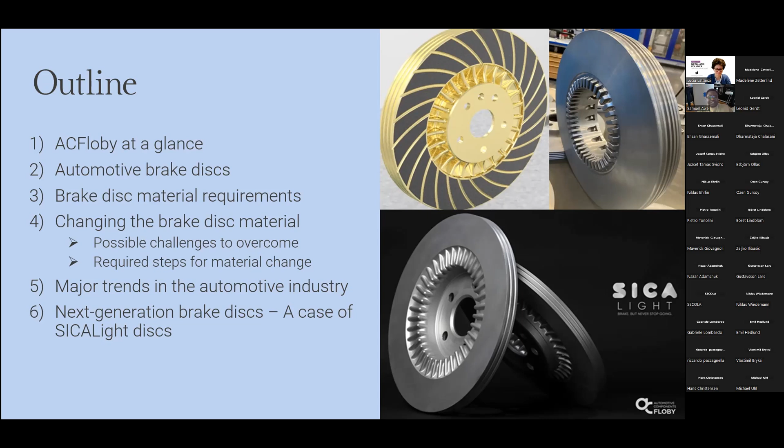Automotive Component Floby is a company that was founded in 1965, and the company since then has been producing different automotive parts for auto manufacturers. You could see from the picture some of the products we produce. Here is a brake disc from gray cast iron material. Also, we have brake discs from aluminum composite material, trade name SICALight brake disc. Then we produce connecting rods for different vehicle models. We produce wheel hubs for trucks, and different processing methods and surface treatments we perform at the company.

Yes, before we go into the full discussion, we want you to answer this question in the chat. How many of you want to be confident in driving your car? So this is a good question that will give us an introduction to what we are going to discuss.

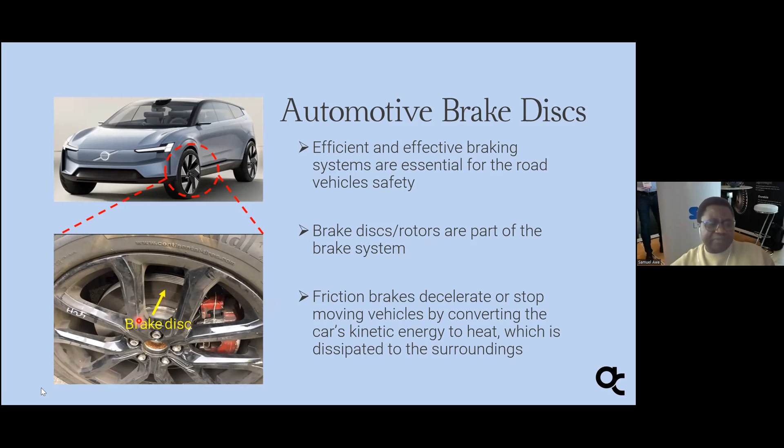During the braking regime, heat is generated, and this heat is majorly concentrated on the surface of the disc. If this heat continues accumulating during the braking regime, it could lead to overheating of the brake component, and this overheating could cause brake fading.

Brake fading simply means loss of friction, and increase in the temperature of the disc leads to increased wear, and that will also lead to thermal cracking as a result of a thermal gradient happening on the surface of the disc. An example of thermal cracking is what you see on the disc here, which eventually leads to failure of the disc.

As a result of this, it is very important that material for brake disc should meet certain material properties to prevent loss of function.

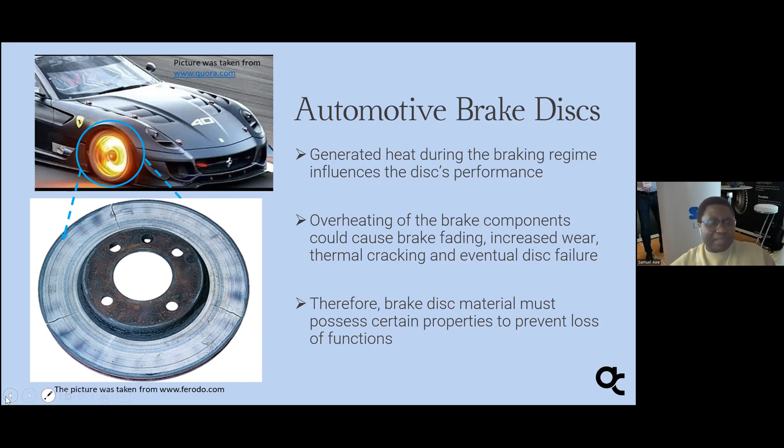Here are some brake disc material requirements. As I've explained in the introduction, the brake disc material must maintain high temperature properties, because the disc is usually subjected to high temperature during the braking system and regime. So this material must meet this high temperature property.

It should have a good wear resistance, because we don't want to generate more fine particles. Then it should be corrosion resistant. Now that we have electric vehicles, corrosion becomes so important, so the material should have high corrosion resistance.

At the same time, the material should be lighter in weight, especially for electric vehicles. The weight of electric vehicles is higher, and this is important too. The OEMs are looking at different ways to reduce weight, because increase in weight has an effect on car performance as well as drive range, especially for electric vehicles.

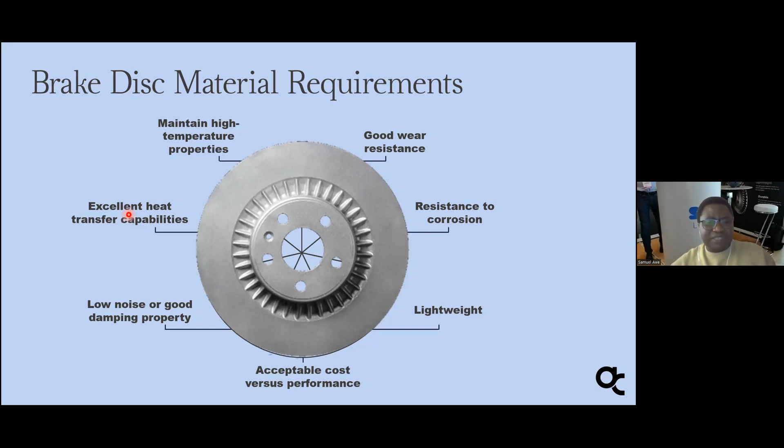Then there should be excellent heat resistance and heat transfer capabilities. The material should have good heat transfer capability. As I've explained, during the braking regime, you will have high temperature concentrated on the surface of the disc, and the material for brake disc should be able to conduct the heat away from the surface. If not, it will lead to thermal cracking and thermal fatigue failure.

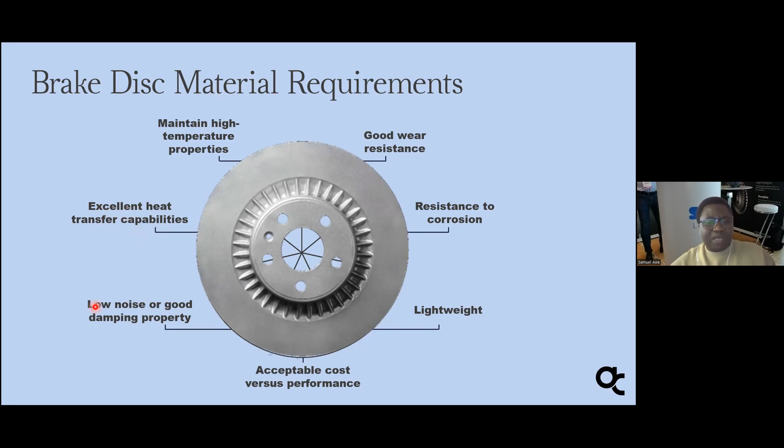Then the brake disc material should have good damping property, or possibly low noise. This is very important, because material with poor damping property will create noise which is uncomfortable when driving your car. The material should also have an acceptable cost versus performance, because if the material is too expensive, nobody will want to buy it or go for it.

So these are some of the material requirements for brake disc application.

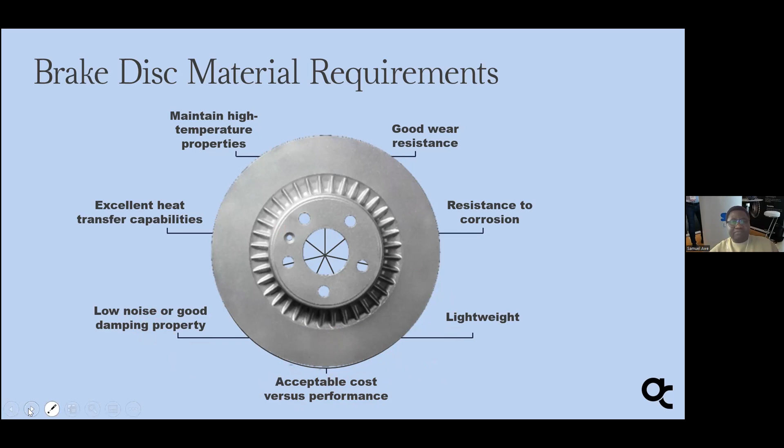Now, changing brake disc material. What are some of the possible challenges? Besides meeting the material requirements as I've highlighted earlier, the developed rotors must overcome some of the conditions before it could be accepted.

One of those conditions is that the rotor from the new material must satisfy the minimum safety standard and performance requirements. As I've said earlier, the brake rotor is a safety component of a vehicle, and it is well regulated by the government in many countries and other stakeholders. Therefore, any new material for brake rotor must fulfill or certify these minimum standard safety requirements and performance requirements.

Then the rotor must also fulfill several standard brake test procedures. This is performed on the rig testing or bench testing, usually called dynamometer testing.

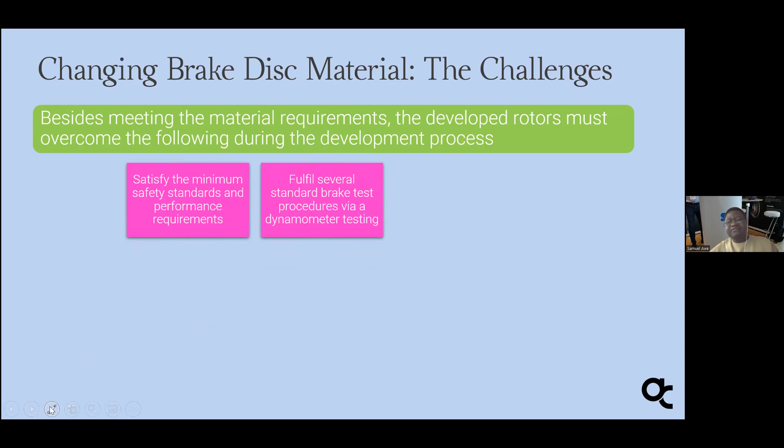After that, the rotor must also pass vehicle brake test procedure. So there is a difference between bench testing and vehicle testing procedure, because in the dynamometer test procedure you could simulate in a well-controlled environment.

But this is actually different from the real case when driving a car, because you come with an external environment. Like during winter, the disc comes in contact with cold winter snow, and also during winter you have salt to de-ice the road. So the disc comes across that, and that will create different performance issues.

Apart from that, we also need to look into the dynamics of the vehicle. Aerodynamics of the vehicle play an important role in the performance of the brake rotor. So these are different testing procedures.

So the disc must pass vehicle test, and also development of a compatible brake pad is important. This is another concern or challenge, because if you are developing a brake rotor, you must have a compatible pad for it. You cannot use one particular pad on different materials. So this has to be done together with a pad manufacturer, which is another challenge to overcome.

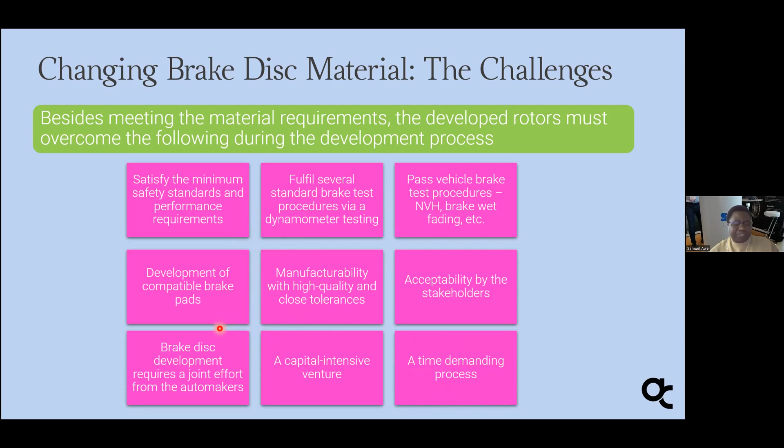Next, we look at some of the basic tests that need to be passed or fulfilled by the newly developed rotor. One of them is the Alpine descent test, which is done via dyno and could also be performed through vehicle testing. The car is driven at a constant 20 km per hour, with energy input over a long time, approximately 20 minutes, going downhill. This has to be passed.

Here you see how the friction behaves, and how heat is generated and dissipated. So several other factors are analyzed.

Then another one is a very tough testing procedure, we call it the AMS 100 test procedure, or field test. Here you drive the vehicle at very high speed, 100 km per hour, and for a short period, about 2 minutes, you have to apply the brake, bringing the car to 0 km per hour. At the same time, you accelerate it back to 100 km per hour, then bring it down. You have to do this 10 times.

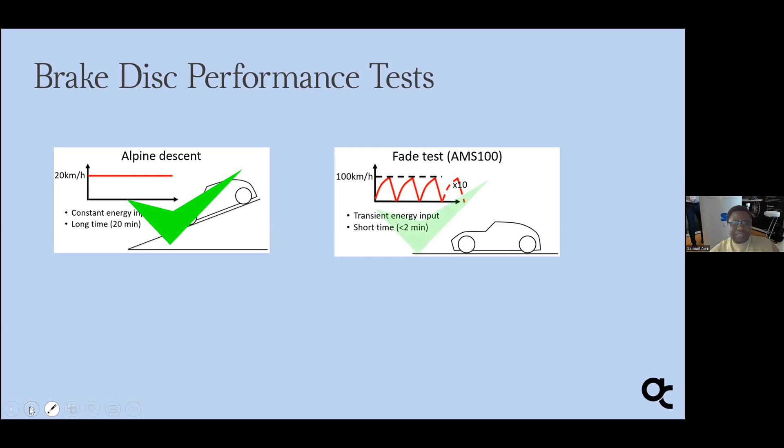This has to be passed. Then next is a single stop. This is a transient energy input, which you apply from maximum speed to 0, in less than 10 seconds application. So this has to be passed as well.

And the fourth one I put here is a high load crack test. This is subjected to extreme load case. We want to see how the material will fail if a crack will be developed on the surface. For gray cast iron, when under this condition, there will be phase transformation in the microstructure, which will also influence the response of the disc during braking. So this will be analyzed, and how the crack is developed.

Then another thing that is also analyzed during this is a deflection of the disc, or coning of the disc. Because if that happens, then that could lead to noise issues, because there will be variation in the thickness of the disc. So this must be passed.

And there are other test procedures that need to be passed, but here I limit to these 4. So it is when all these test procedures are passed, then you could have something to present to the authority or to the OEM to convince them to accept the rotor you have developed from new material.

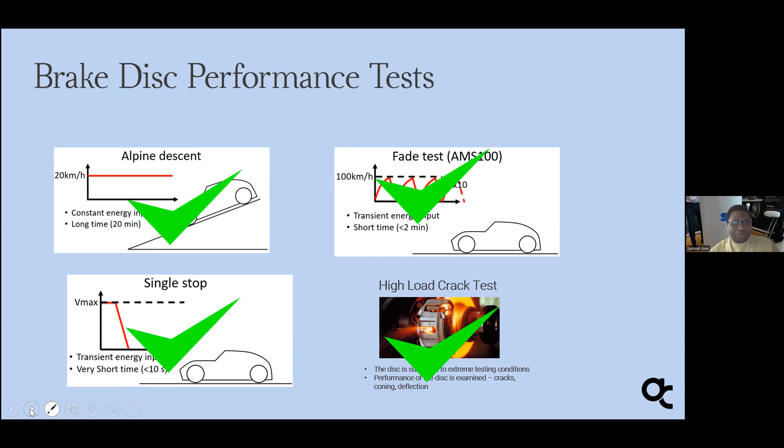Yes, here I will talk briefly. So I will talk briefly on the journey of a SICALight development procedure or process.

Aluminium rotor that was developed at ACFloby started in 1995 when the concept was started, and the brake rotor design started during this period. And later on in 1998, discussion about how this could be manufactured was started - the process of manufacturing the rotor and the material. So all that was started in 1998.

And in late 1999 to 2000, a patent application was filed for the rotor development and the surface treatment. So this was filed.

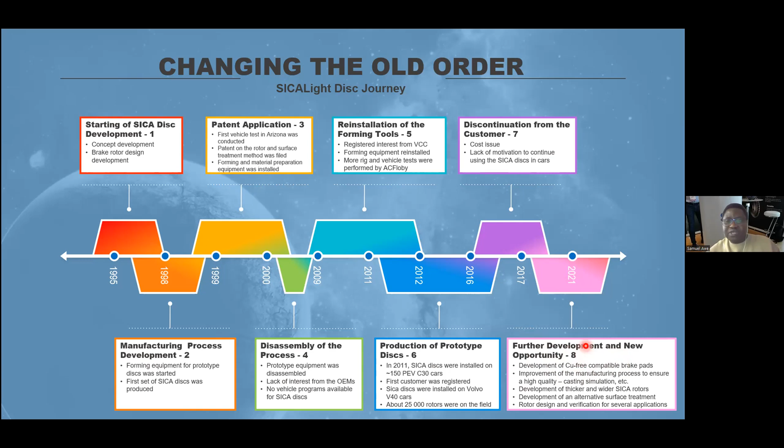The major trends in the automotive industry—we talk about three major trends, and the first is the electrification of vehicles. Statistics show that increase in vehicle electrification in the auto market will continue to dominate and increase, and this comes with some other challenges which I will discuss next.

Next is non-exhaust particle emission. This has become more focused. Last year there was information on Euro 7 regulation on particle emission, so the exhaust emission has been well controlled. Now that we have electric vehicles, non-exhaust emission becomes an important part to control.

The other part is circular economy, which is another important area in the automotive industry—dealing with sustainability, recovery and recycling of material. These are some big areas that are trending in the automotive industry currently.

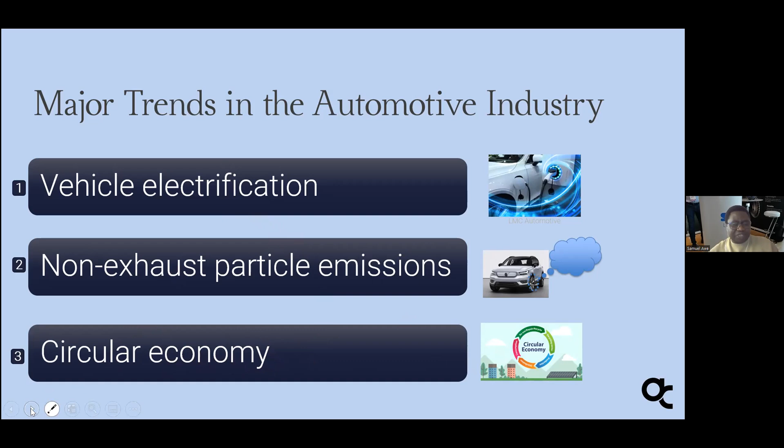Now, a little dive into the difference between traditional vehicles and electric vehicles, here in relation to the braking system. In the traditional vehicle, the brake rotor is used 100%, so friction brake is used 100%, and that means gray cast iron is good enough. Corrosion issue will not be a big problem for traditional vehicles, because the pad always cleans the friction plane or surface of the disc.

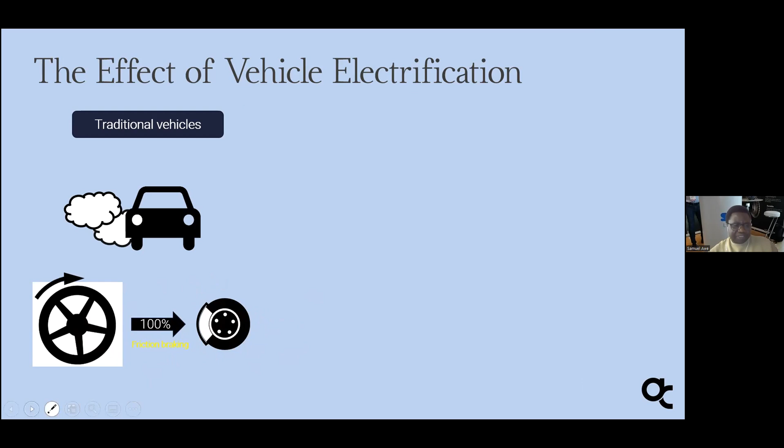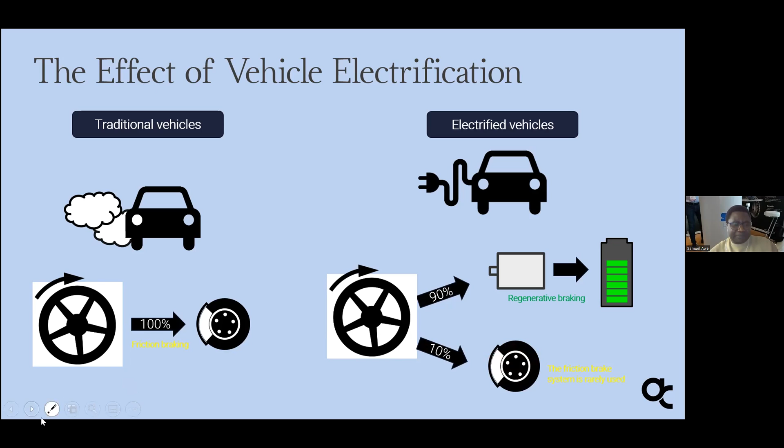But for the electric vehicle, most of the braking is done on regenerative braking—about 90% of it. Although the vehicle is still equipped with a frictional brake system, these frictional brake systems are seldom used, approximately 10%, needed mainly in case of emergency braking. So what will be the problem is that when the frictional brake system is not frequently used, the issue of corrosion will be prominent.

So here are the major challenges of electrification of vehicles in relation to brake rotor. One is the increase in vehicle weight—the battery in an electric vehicle constitutes approximately 25% of the vehicle weight, which is very huge. It is good if we could equip that vehicle with a lightweight rotor, as it will reduce the rotational inertia when using the rotor, and as a result improve the acceleration of the vehicle.

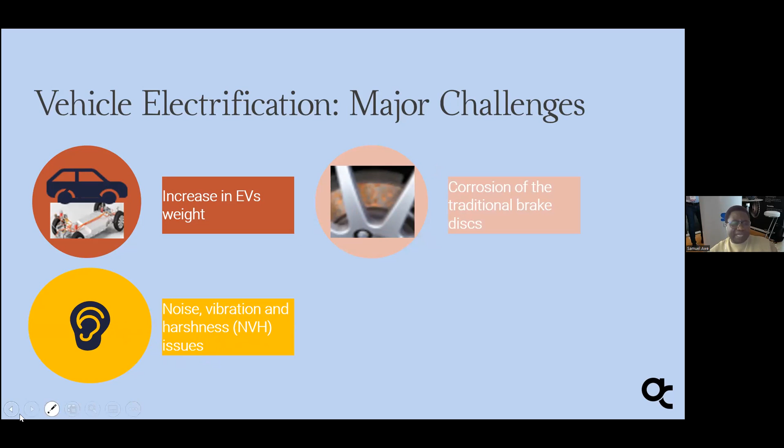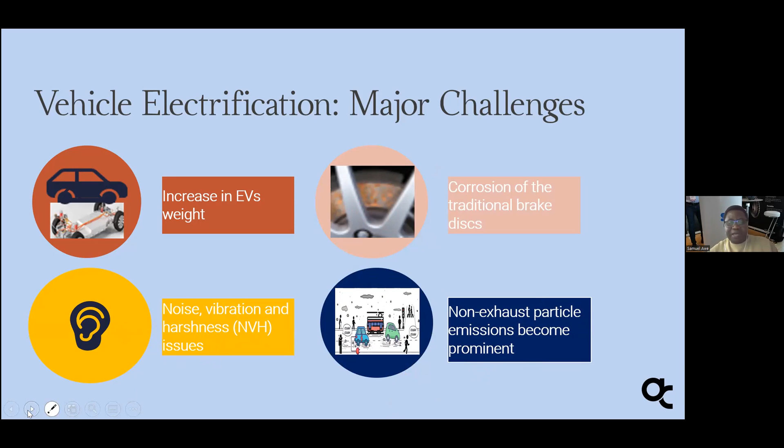Another challenge: as mentioned earlier, if a traditional brake disc is used in an electric vehicle, corrosion will be a major challenge, as you can see in the image. If this rust continues on the friction surface of the disc over time, it will lead to pitting on the surface of the disc. When that happens, there will be vibration issues leading to NVH issues—noise, vibration, and harshness—and judder problems will occur during braking. This will be a big challenge, and as a result, when rust develops, more particles will be generated, leading to non-exhaust particle emission. These are some of the major challenges related to the brake system of electric vehicles.

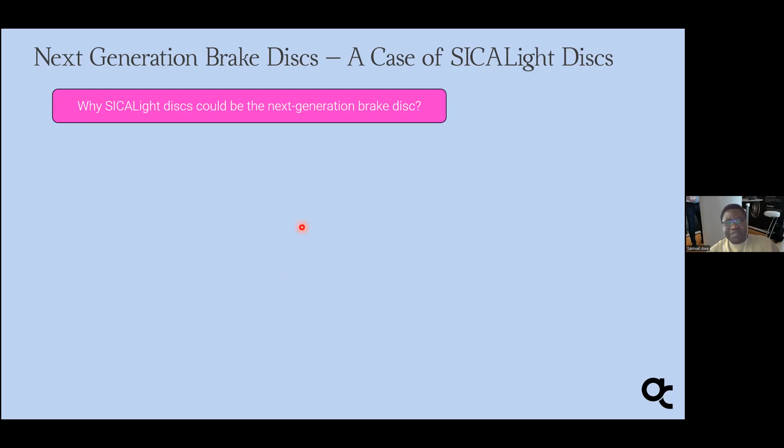Now, next generation brake rotor—a case study of a SICALight disc. Why could SICALight disc be the next generation brake disc? One, it is lighter in weight, meaning weight reduction—approximately more than 5 kilograms per car is saved if an aluminum rotor is used. Also, using this for electric vehicles reduces rotating unsprung mass, which implies improved acceleration of the car.

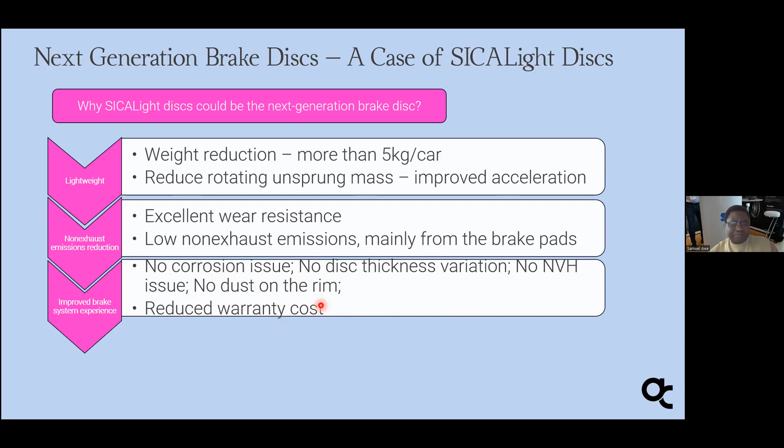The next benefit is non-exhaust emission reduction. The aluminum rotor has excellent wear resistance, meaning it doesn't wear, so low non-exhaust emission is achieved, mainly coming from the brake pad—the aluminum SICALight rotor doesn't wear on itself. Then, the issue of corrosion is a thing of the past for SICALight disc. No disc thickness variation, no NVH issue, no dust on the rim, which means it will also reduce warranty cost, because when the owner of the car doesn't have any issue with the brake system, there's no need to contact the manufacturer for a claim.

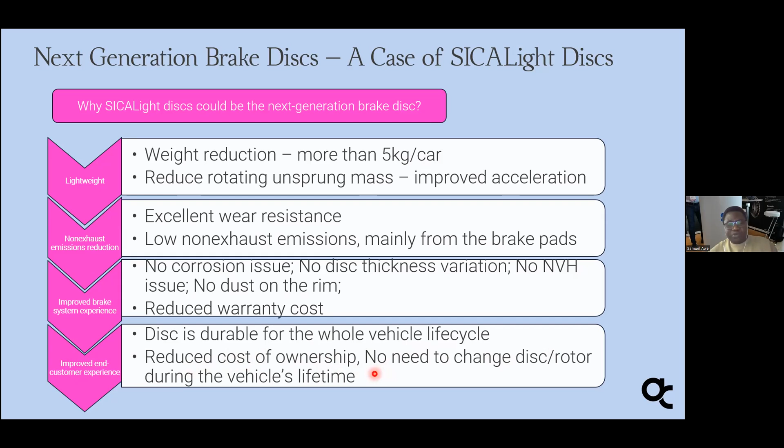We also see improved end customer experience—it is durable for the whole life of the vehicle and reduces cost of ownership, so there's no need to change the disc during the vehicle's lifetime.

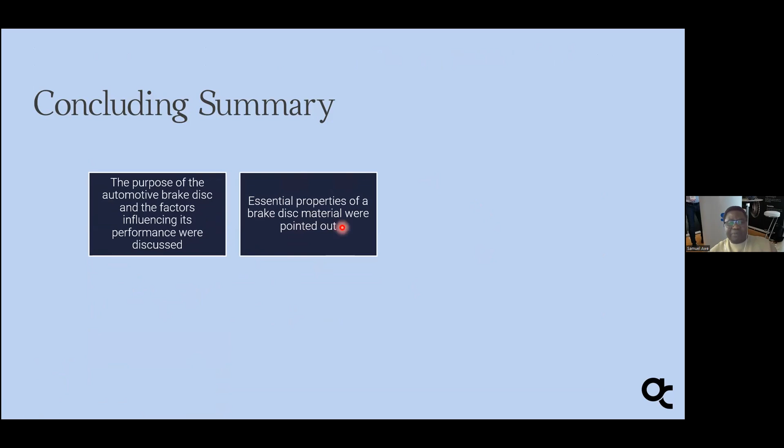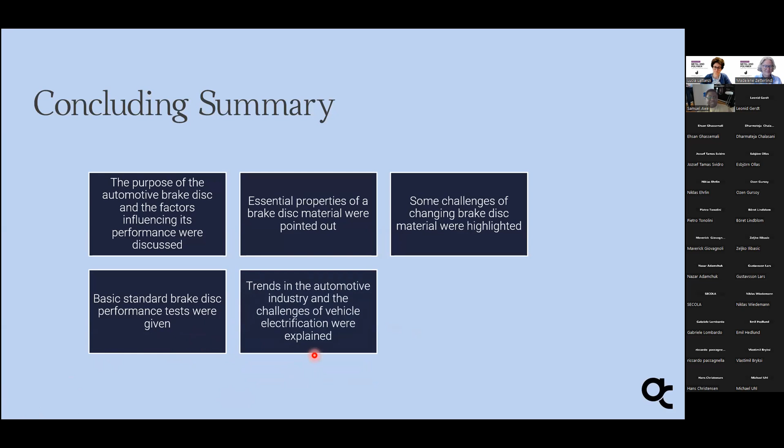Finally, in this webinar we've talked about the purpose of the automotive brake disc and the factors influencing its performance. Next, we looked into the essential properties of a brake disc material, briefly discussed some challenges of changing brake disc material, basic standard brake disc performance tests that need to be met, and the major trends in the automotive industry and the challenges of vehicle electrification.

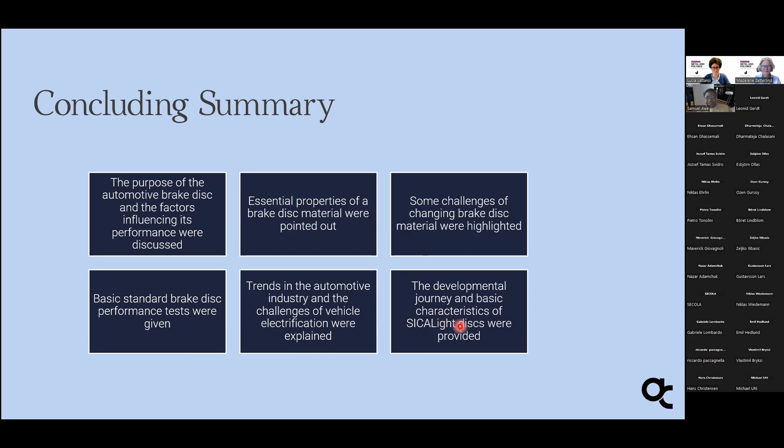And finally, we talk briefly on the developmental process journey and the basic characteristics of a SICAlight disc as a brake disc material for the next generation brake disc. So, thank you.

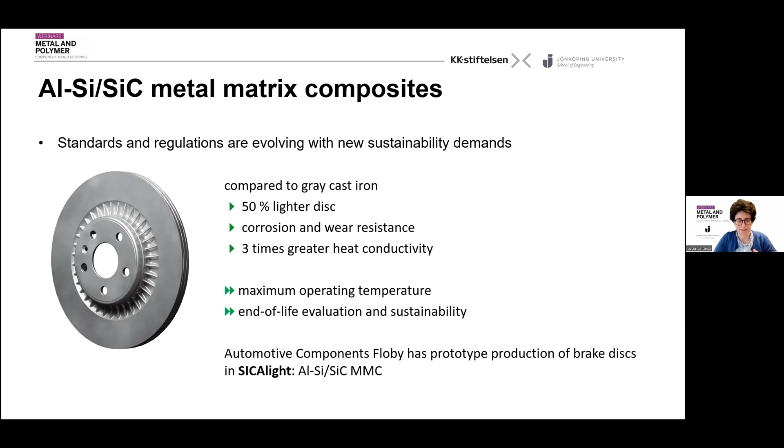Also, another aspect to look into is the evaluation of the end of life of this product or the composite in general, and the sustainability role that this material has at the end of the life of the product.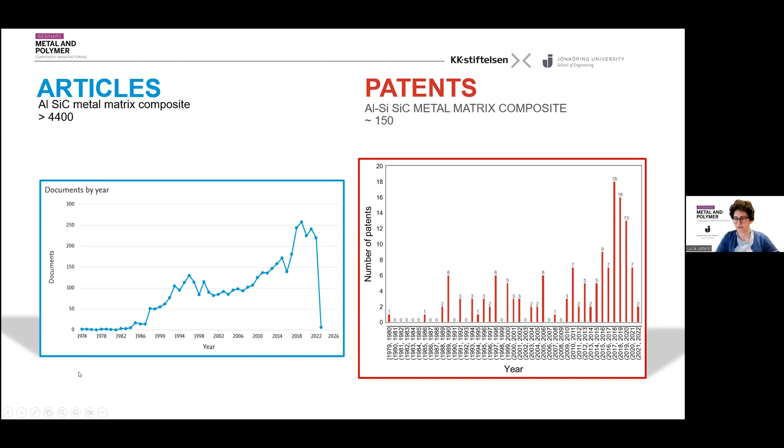As Samuel said, now there is a new interest in this kind of material, although they were originally developed in the 90s. As you can see, this new interest is both from the academic community, as you can see from the article side. If you look for aluminum silicon carbide metal matrix composite, there has been a peak in publications in recent years. This is mirrored also in the number of patents approved in recent years, again with a huge peak compared to when these materials were initially developed. So this new interest is not only from the manufacturer side, but also from a research point of view.

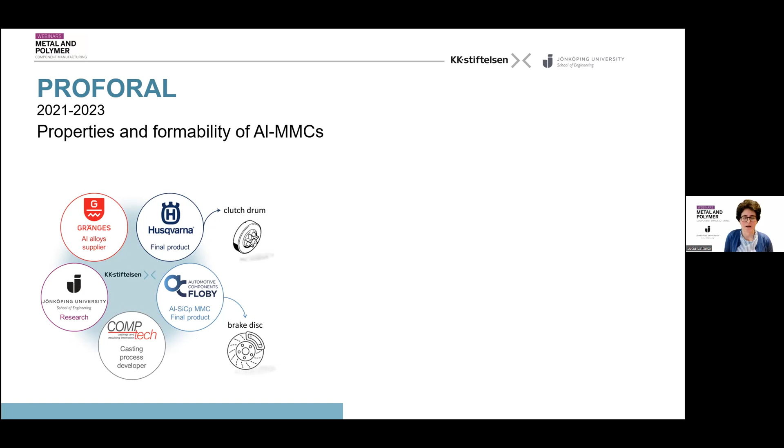So let me show you what we are doing here at the university and what active projects we have for this material. The first one is called Proforal, about properties and formability of aluminum-based composites. It's in collaboration with Gränges, Husqvarna, Comptech, and of course AC Floby for the brake disc. In this project, we look into several strategies to improve the maximum operating temperature of the aluminum composite.

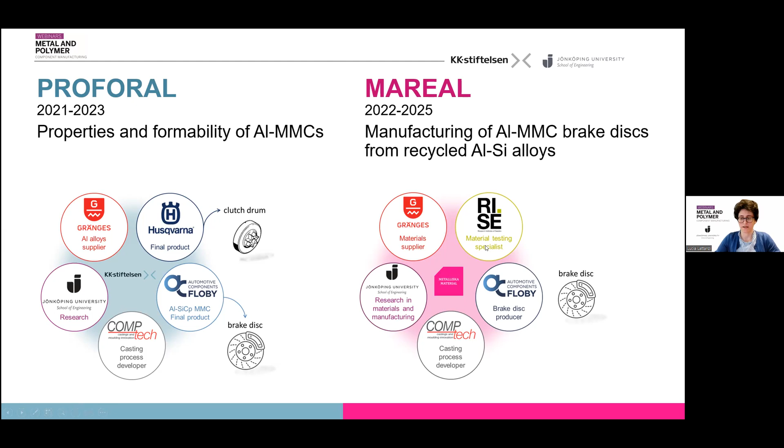The other project is called Mareal, about manufacturing of aluminum composite brake discs from recycled alloys. So to take one step further towards sustainability and see how recycled alloys affect the properties of our material. This is also in collaboration with Gränges, Comptech, the Swedish Research Institutes, and AC Floby again.

Looking into Proforal, the strategy was to optimize the matrix for high temperature. That was our first step. Then we evaluated different mechanical properties, but also the durability as wear and hardness. And also we looked into corrosion a little bit and thermophysical properties for the heat conduction.

Then the second step is to look at the process optimization to try to reduce cycle time. The brake discs are currently produced with squeeze casting, which is an excellent technique, but we wanted to see if high pressure die casting combined with warm forming could let us gain a little bit of time in the cycle production.

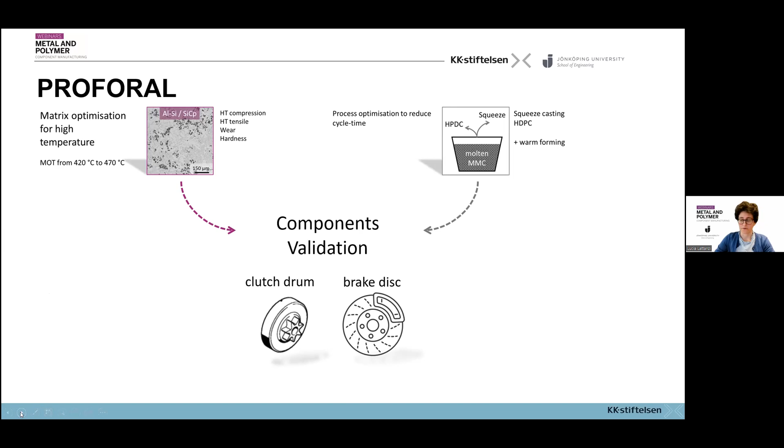And then at the end, we looked at the components of interest. In this case it's clutch drum for the Husqvarna side and brake disc for the AC Floby side, to really see if this material is really promising in this case.

So we started with changing the matrix alloy, and we decided to look into different possibilities of alloying elements to improve the mechanical performance at elevated temperature. The first choice was nickel, because it's known to form reinforcing phases that are thermally stable in aluminum silicon alloys. And thinking of sustainability, nickel is not on the critical raw material list.

Then we decided to also add copper because it is known to interact with nickel in reinforcing precipitates during thermal exposure. It's not on the critical raw material list, but the challenge with copper is that it has issues with corrosion and ecotoxicity. If it is dispersed in the environment, there are regulations that limit its use. But to keep all our possibilities open, we decided to also go for that.

And then we also decided to try to look at the role of lanthanum and cerium, so rare earth elements in this case, which in literature are said to have as-cast matrix strengthening, but the negative side is that they are on the critical raw material list. So that would be a challenge for sourcing in this case of these two elements.

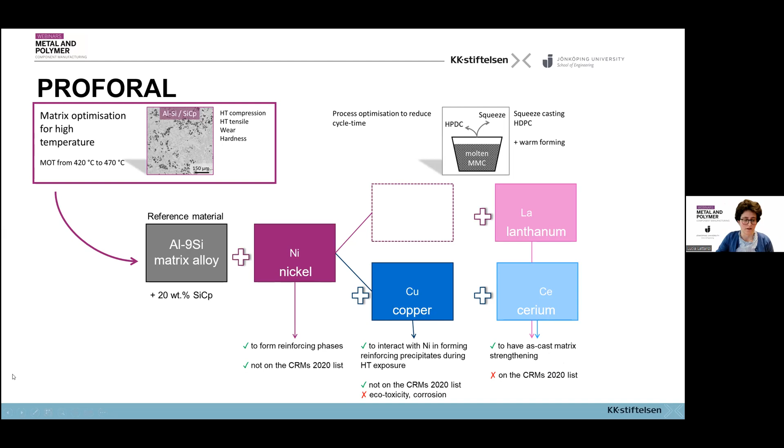But how does a composite really look like when we look at the material in the microscope? If you're not familiar with it, let me briefly explain.

If we look at the mechanical properties, we were very satisfied with the different results we could see. Nickel really gave a significant improvement of the mechanical properties at room and elevated temperature, up to 470 degrees. The copper addition after nickel kept that improvement constant, but without additional effect of reinforcement. Lanthanum and cerium instead showed a promising improvement only when combined with both copper and nickel.

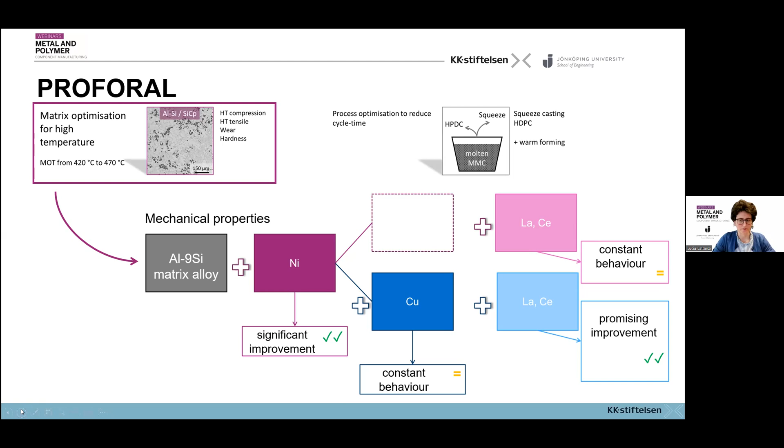So the next step of the project is to explore the possibilities in terms of process optimization, in the effort to reduce cycle time for this kind of material.

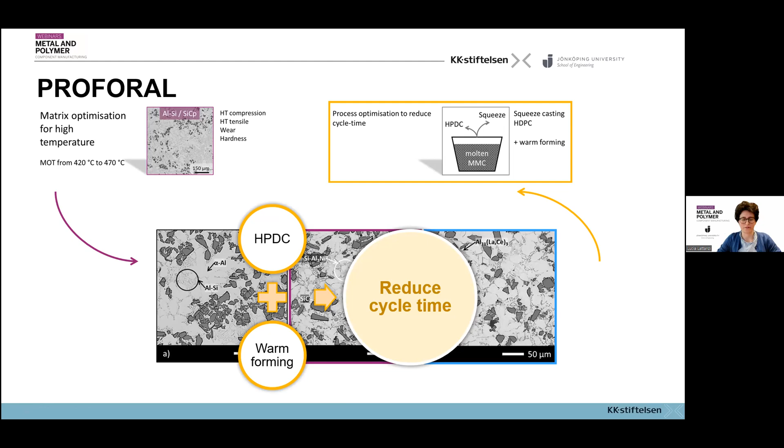And then at the end, we will also move to component validation, because all the tests we do are at the laboratory scale, but we also want the real point of view with the real component in the end, to be sure all the steps we take are satisfying for our partners.

Moving to Mareal, as I mentioned earlier, in this project we focus more on the sustainability aspect of these materials. The aim is to add different amounts of recycled alloy as the matrix for our metal matrix composite. We check the microstructure and mechanical properties mainly to be sure this material still satisfies all the requirements to validate performance in a lightweight brake disc that is also sustainable.

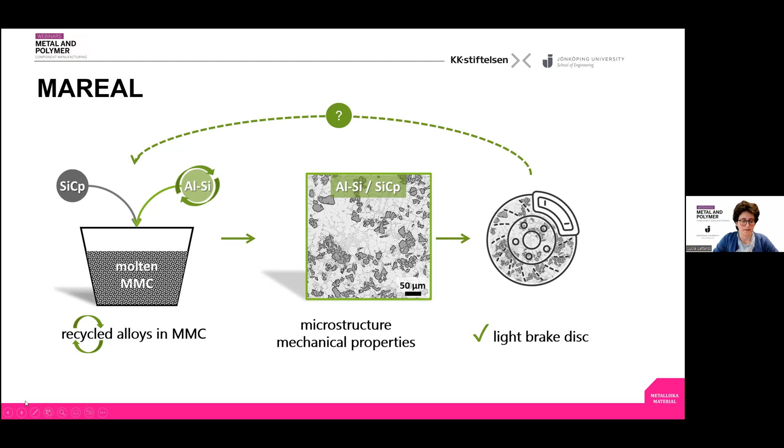Another question in our project is to start looking into the recyclability of the composite itself. So what happens at the end of the life of the brake disc, when the material comes back and we remelt it - how do the carbides behave? We know there is a settling effect. So does it make sense to separate the carbides from the matrix and recover the two materials separately, or can we still stir the carbides again and give a new life to the material?

We directly noticed, trying 100% recycled matrix alloy, that the recycled metal greatly affects the distribution of the carbides in the microstructure, as you can see in this picture for comparison. So what we are looking into more is whether the difference in dispersion changes the properties, and if it changes them in a too damaging way, or whether we can still make compromises and accept these new properties.

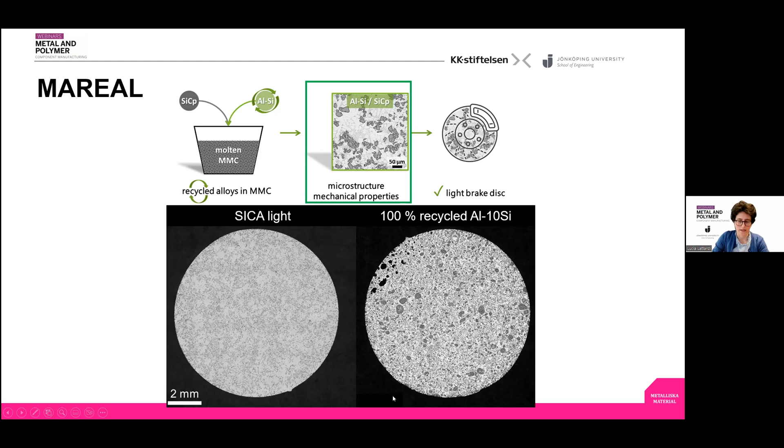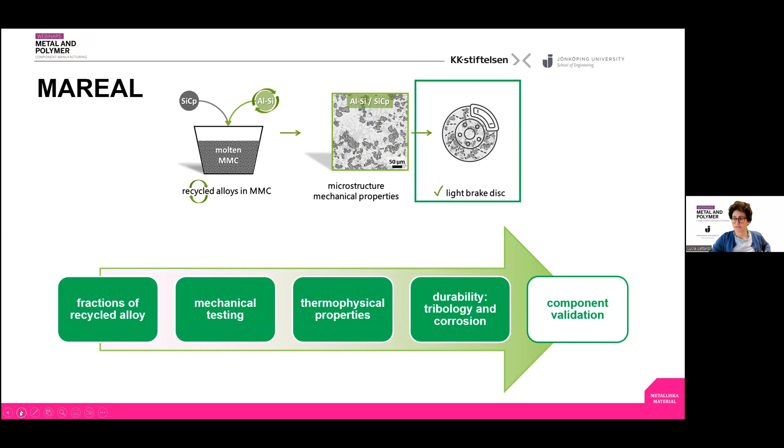So how much are we affecting the properties of our material with the final application of the brake disc in mind? We will compare the role of different fractions of recycled alloy in the matrix, and then look again into mechanical properties, thermophysical and durability behavior of this material at a laboratory scale to start with, and then move to component validation to see the influence on a larger scale for this kind of application.

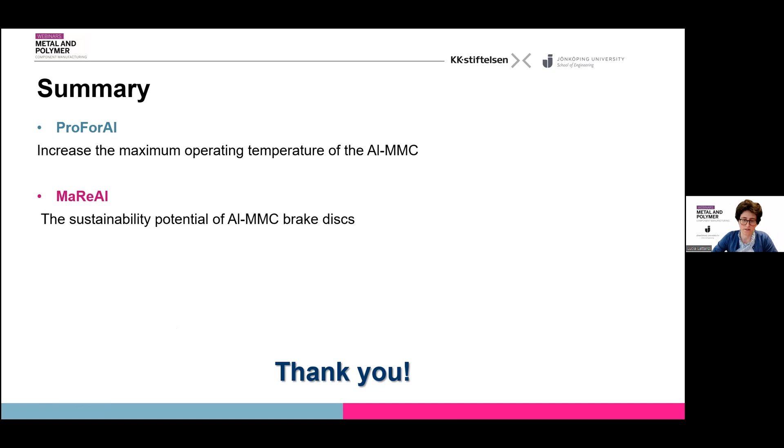So to summarize, we look at aluminum-based composites from different points of view, trying to improve the maximum operating temperature - what are the possibilities there, how much we can play with the matrix alloy and with the process - and also looking into the sustainability potential of these materials, or of the composite brake discs themselves. Thank you very much.